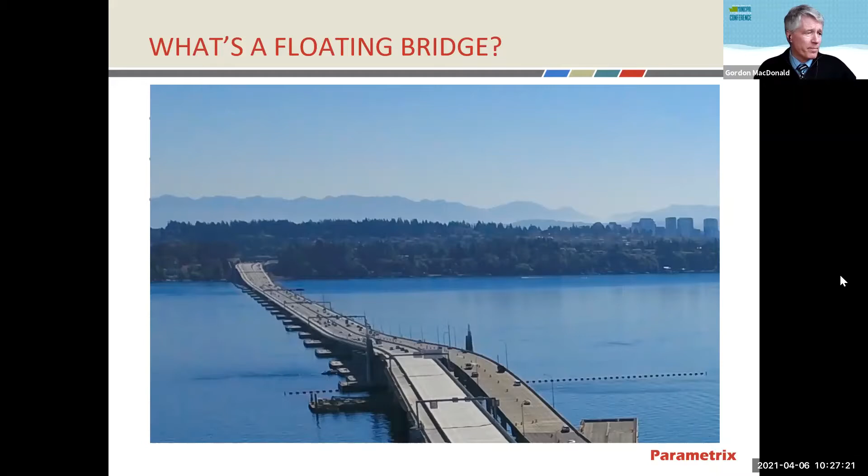And so that raises some concerns and some unique challenges, because you can't convey and treat stormwater the way you would in a landside environment.

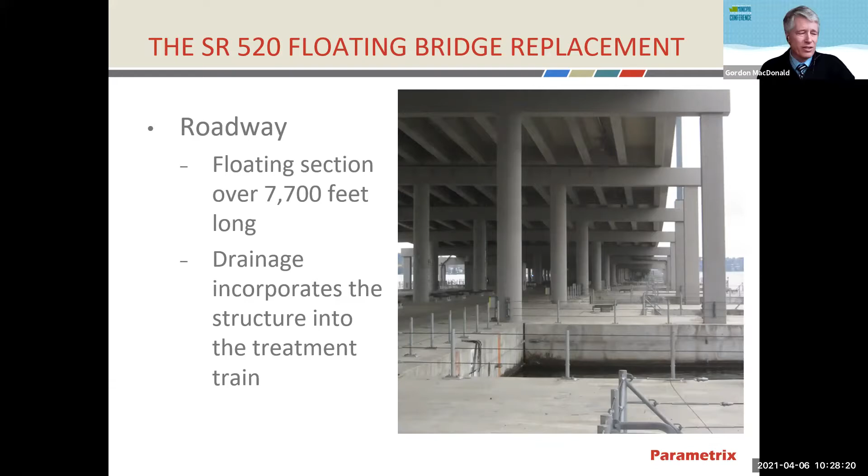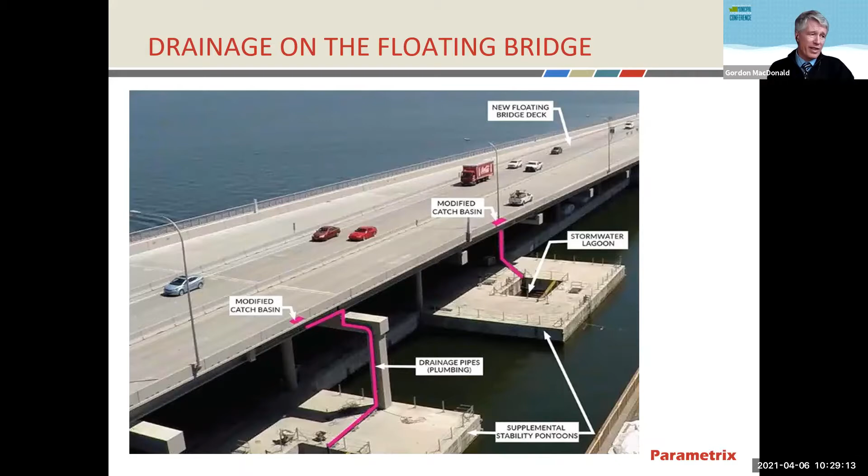So how does stormwater get from the deck of the floating bridge down to the lake level? We installed modified catch basins - meaning they have a very deep or deeper than normal sump from the invert down. The purpose of that is to collect more grit and sediment from the roadside and allow it to settle out before going down the conveyance pipes. The conveyance pipe is connected to the bottom of the roadway deck, then down the structural columns to the supplemental stability pontoons, and across into the center part of those pontoons to what we call a stormwater lagoon. We'll talk more about why that's important in the overall treatment train a little bit later.

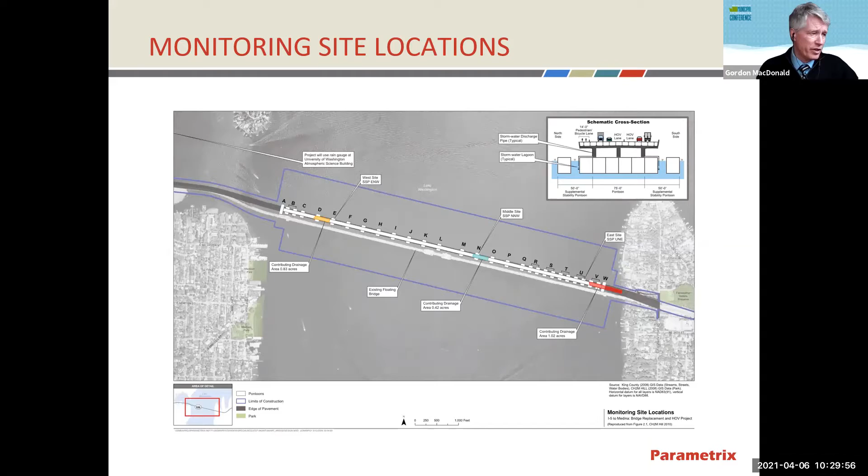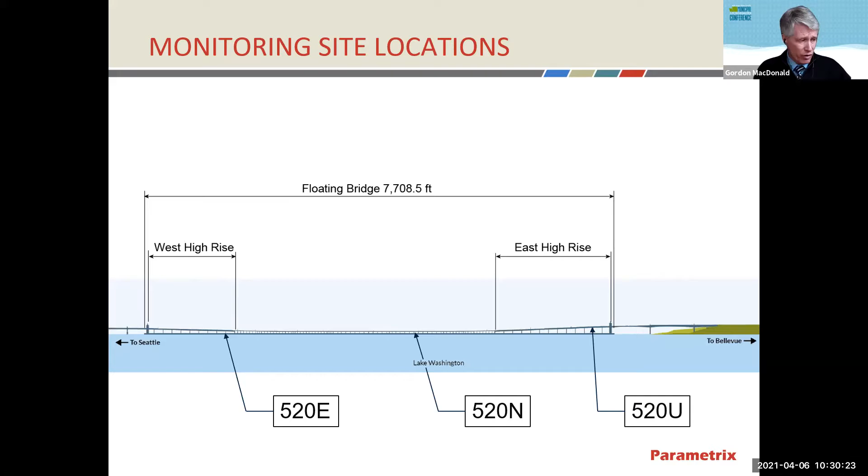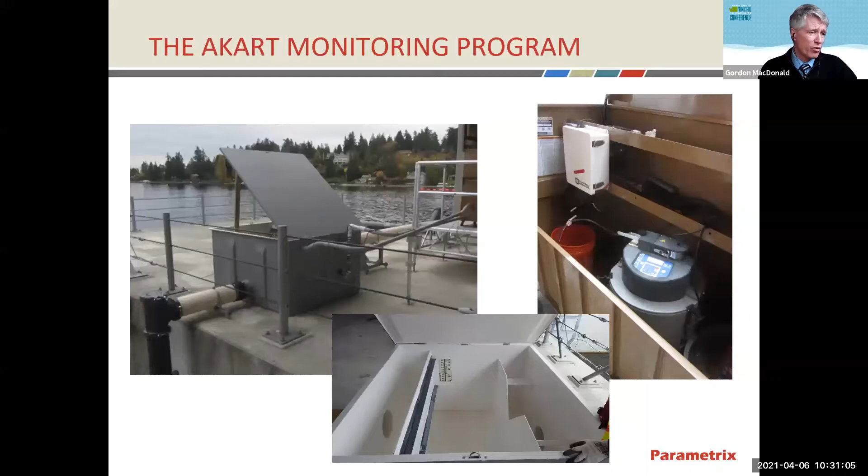As I talked about before, there were some unique issues with conveying and treating stormwater. So we had to develop what is known as AKART, all known, available, and reasonable methods of prevention, control, and treatment. Early on, we looked at different alternatives for combinations of treatment alternatives.

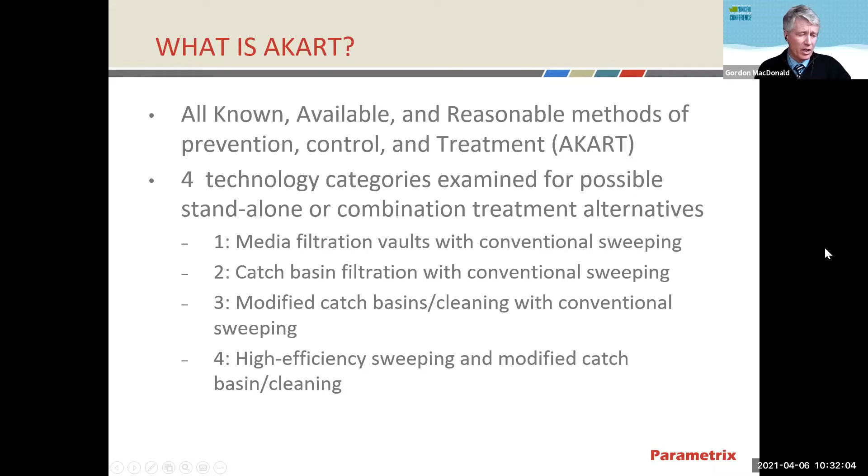One was media filtration with conventional sweeping. Another was catch basin filtration, also with conventional sweeping. And these modified catch basins with conventional sweeping, and also high efficiency sweeping and modified catch basin cleaning. We'll talk about what that high efficiency sweeping really means a little bit later.

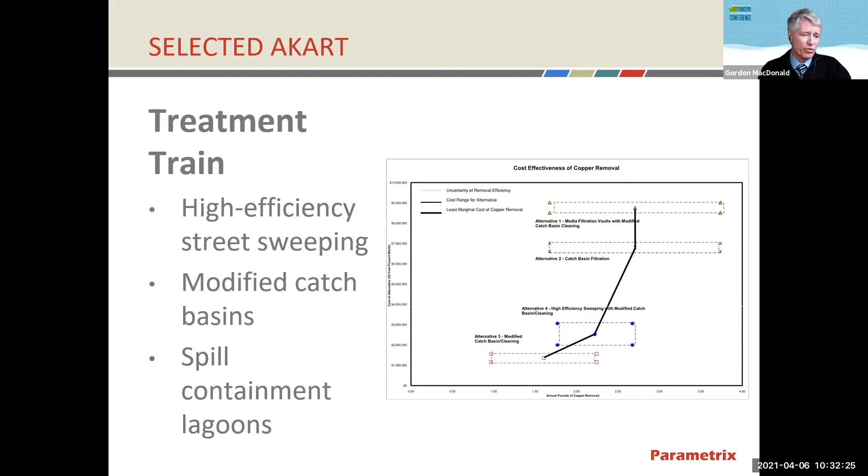In the end, our proposed AKART treatment train included high efficiency sweeping, modified catch basins with a larger than normal sump in the catch basin, and spill containment lagoons. These spill containment lagoons are really what Paul is going to talk to us about - that's the hole in the middle of those supplemental stability pontoons. Go ahead, Paul. Okay, thanks, Gordon.

As part of the AKART analysis, once you have AKART you're able to use mixing zones. As part of the agreement and the approval for the bridge, we had defined a mixing zone that was based on discharging into the lagoons and then mixing with lake water underneath the lagoons. We ended up with a concentration at the mixing zone boundary that was allowable, and that concentration was based on what typical roadway runoff would look like, with sort of treatments to it.

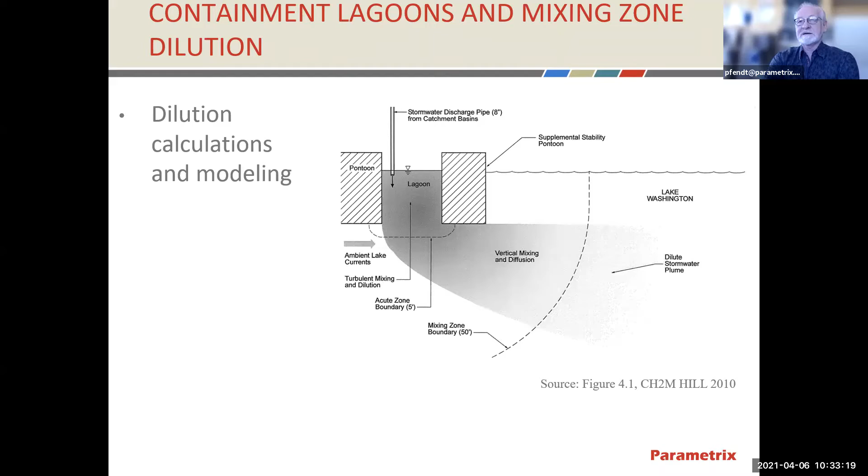So next slide. Basically what happened is that we back calculated from the edge of the mixing zone what the concentrations were that would be allowable there, and back calculated what the resultant concentrations would need to be for the water quality design storm with a certain concentration. The purpose of this was for Ecology to confirm that the performance of our system was going to be able to reasonably meet the mixing zone concentration at the edge of the mixing zone.

In order to do that, different targets were established that are shown in this table. These targets were based on if the concentrations that we monitored were these numbers or lower, then we would be expecting to meet our mixing zone. Remembering that these are based on the water quality design storm - this concentration in the water quality design storm, mixed in the lake and in the mixing zone, results in complying with our mixing zone responsibilities, or our edge of mixing zone responsibilities.

So I highlighted the copper. We're focused a lot of what we're going to talk about the rest of the way on copper. What we needed to do, and what the agreement was, is that during the course of our monitoring, where we're going to monitor 22 storms, we could not exceed this number, 67.7 parts per billion, more than once. Mid-span is a slightly different size basin and so has a different mixing zone, so it was a slightly higher number. But we're really focused on the 67.7.

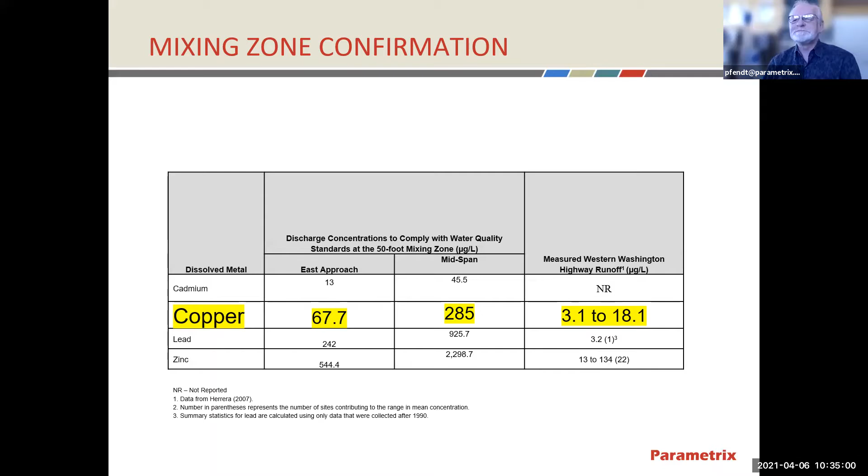Next - so what does high efficiency sweeping mean? The sweeping identified in the AKART analysis is to do it once a month, and by schedule WSDOT does it once during the first 4 days of the month. They wouldn't tell us exactly which one. They sweep the entire road surface, seat to seat, meaning in front of the ecology block walls, wall to wall, inside and outside the shoulders.

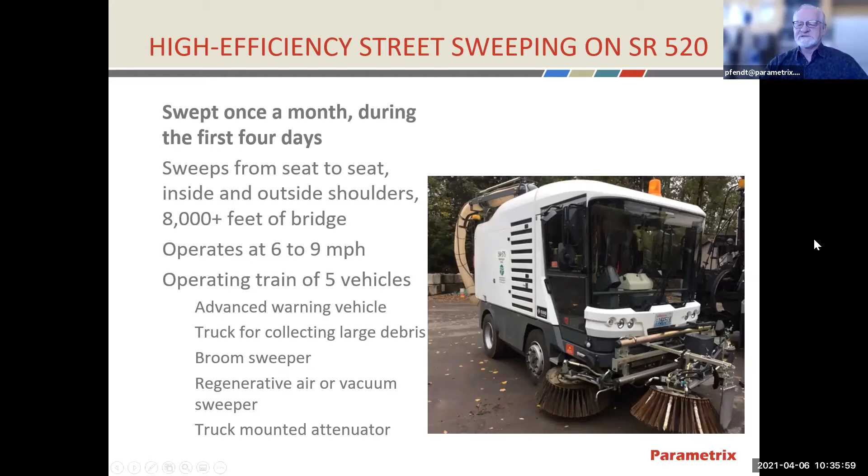A little bit over 8,000 feet - they go up the approaches. There's a vehicle train with 5 vehicles that goes at 6 to 9 miles an hour, and they do it in the middle of the night. There's a number of different vehicles: warning vehicles, one vehicle that picks up the bigger stuff, and then the real heart of this, the regenerative air vacuum sweeper that does all the sweeping, and then basically the rear guard for this approach. So it's a 5 vehicle train that goes up and down the bridge once a month in the middle of the night.

Our AKART monitoring objective was to meet that dilution target that I mentioned, and we could only have one event allowed to exceed. What we were doing in the monitoring program was evaluating sweeping and oversized catch basins and how well they were doing. By the statistics identified, we needed to do 22 events total at the 3 stations that qualified.

And then we had to set everything up on the bridge. So you saw the setups that we had for the weir boxes that were measuring the flows, identifying and cutting into the drainage pipes coming off of the road surface, then intercepting that water and sampling that stormwater and sending it in.

We needed to calibrate the systems. It was pretty easy because it was all impervious surface, but we did find a little bit of difference based on some delays with storage of water actually on the surface of the pavement and so on. So we made those adjustments and set up all the other logistics about getting ready to sample. And then we cleaned out the catch basins right before we started, so we were starting with basically a clean slate.

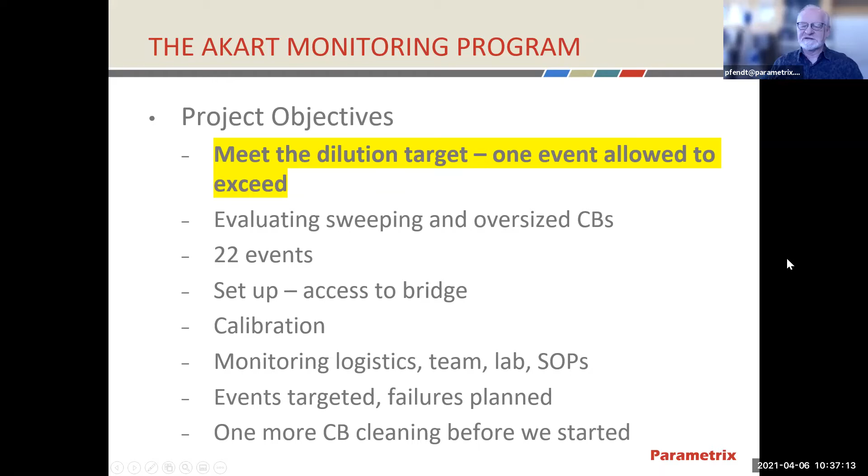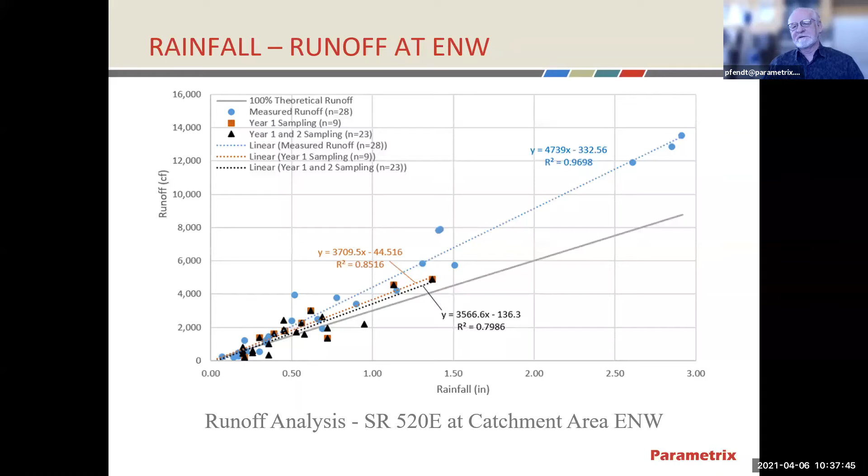This is a result of the calibration. You can see that the heavy bar is what the theoretical runoff would be, and we had slightly different numbers than that. The purpose of this was to make sure we were calibrating what our expected runoff would be against the rain gauges that were about a mile away, so that we could program the samplers to get the right sampling regime for the right sample size for our mixed samples.

Now we're going to talk about some results. These are the basic results of dissolved copper in the stations by season, roughly by calendar season - December to February and so on. The first season is winter, second and third are summer, and the fourth is fall. The chart on the right shows the same thing as the left, only zoomed in so you can see more detail on where our concentrations were. You can see they were pretty consistent and basically in the teens, other than a couple of outliers in the summertime.

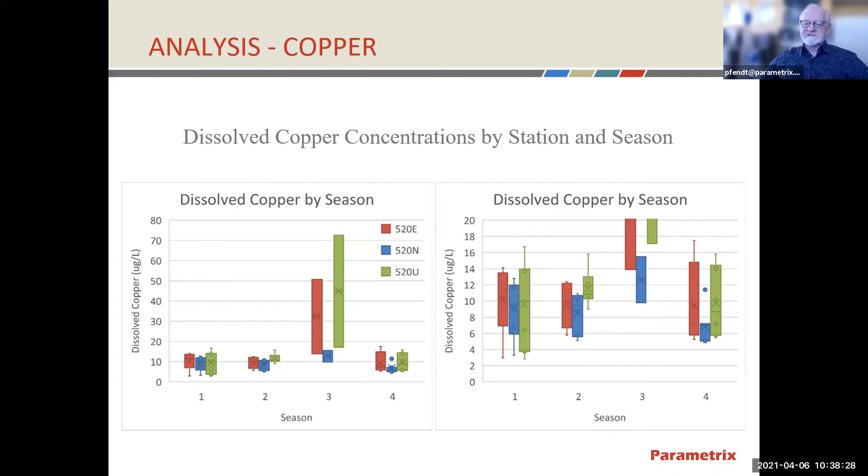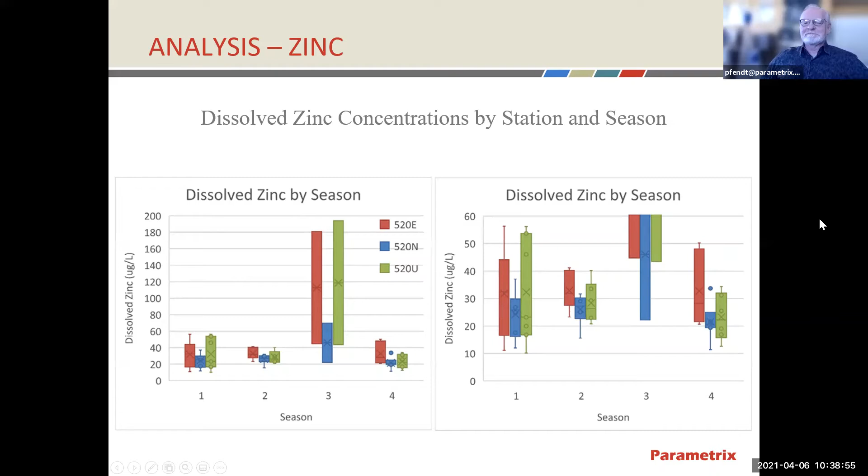In our analysis, we only had one event that exceeded out of 66 - that's 3 stations times 22 events. We only had one station and one event where we exceeded the copper target. All the other constituents shown on that original chart were met for all the sampling events. As we described, our program confirmed that our predicted analyses of concentrations at the edge of the mixing zone were validated by the concentrations we were getting. They were actually, other than the one event, generally quite a bit lower than what was expected.

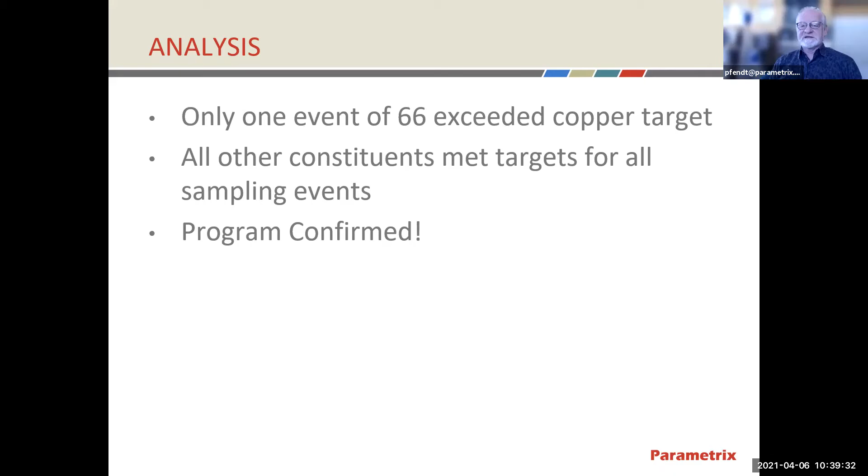So let's dig into the data a little bit here. The first thing we looked at was whether there was a difference in concentrations based on the number of days since we swept. As I mentioned, they could have swept the first, second, third, or fourth day of the month, and you'd think it wouldn't matter that much. Since we didn't know exactly when they did it, we had to assume that every event was one of those 4 days.

We looked at the number of days since sweeping, comparing days since sweeping against the total mass per acre, using the mass concentration of the constituent we're evaluating to normalize for different basin sizes, since the basins were slightly different sizes, so we looked more toward loading rather than concentrations. The trends went up and down depending on which day of the month we guessed they'd swept, and how long it had been since the last sweeping. So that tells me it's really not strongly dependent on how many days since sweeping—sweeping is good, but there's not a strong correlation between earlier and later in the month.

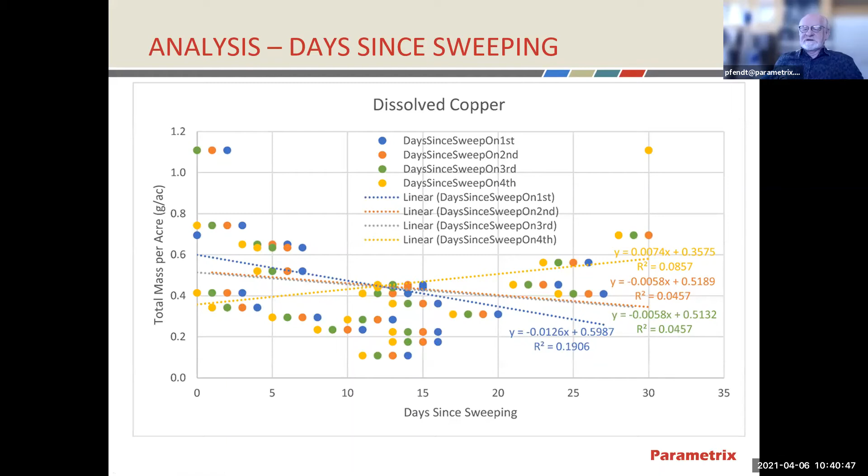Next we looked at how many days since the clean out of the oversized catch basins, to see if any trends developed for dissolved copper by minimum days since the catch basins were cleaned out. We monitored over two years, looking at the first year and second year at different stations, and you can see where the trend lines end up—there really wasn't a difference observed over the course of the year relative to how long it had been since the catch basin was cleaned out.

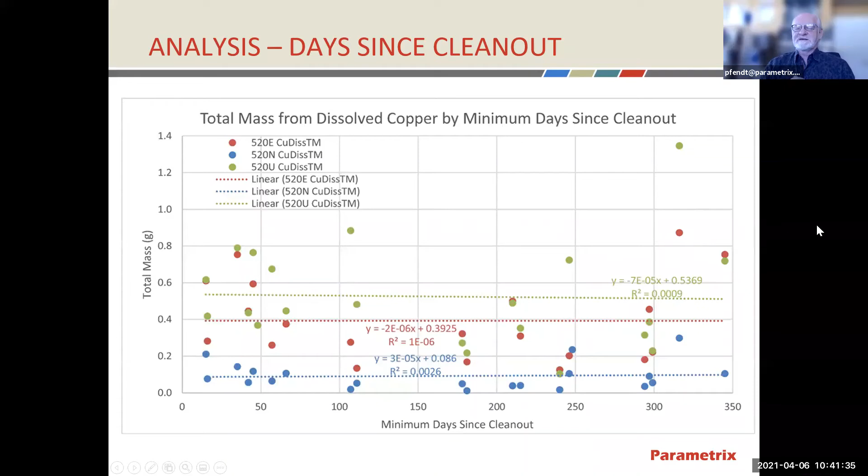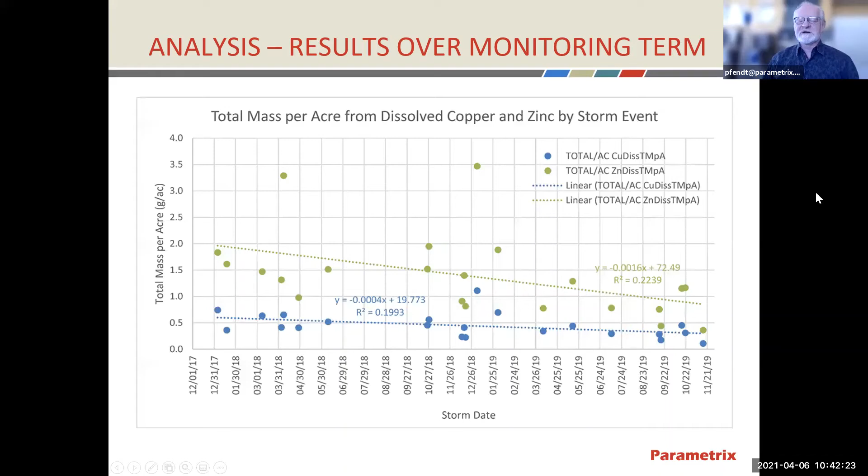We also looked at this over the whole two years of the monitoring period to see if there were changes over the life of the project—the sweeping, the catch basin cleaning, and so on. This shows copper in blue and zinc in green, and you can see just a slight downward trend in concentrations during the life of the project. You can interpret that as you like, but there was a slight downward trend, a lowering of the total mass per acre.

Next we looked at how many antecedent days of no rain there were before each event. We didn't have any event with fewer than, or more than, about 7 days of antecedent dry period. This is just copper, looking at somewhere between 0 and 7 antecedent days over the course of 22 events over 2 years, and how many days since it had rained before. There was a slight upward trend in general on the first couple of stations as you got further from the last rainfall, then no trend—the blue dots at the bottom are the station sitting in the flat part of the bridge.

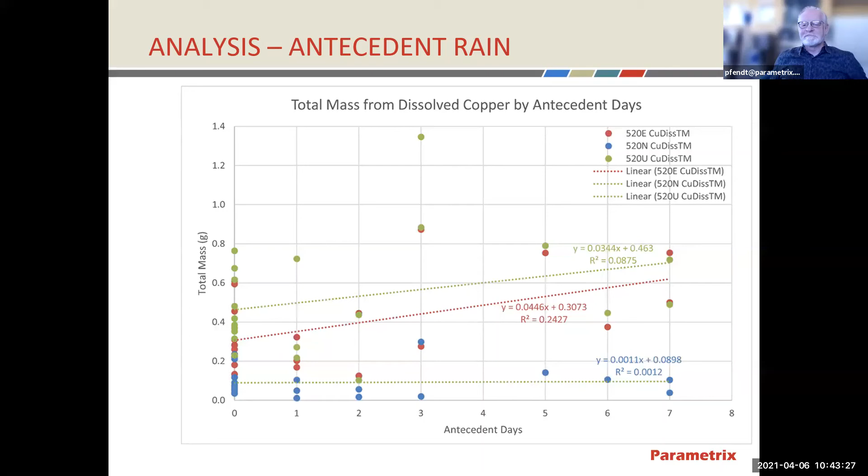This is one of the more interesting things we found—we looked at real automobile traffic counts before the sampling event. We looked at a 24-hour count before we started sampling the storm. This was looking at whether more cars on the road would give us higher concentrations, and this was very immediate, the 24 hours before we monitored. You can see the trend lines here.

Again, this is dissolved copper, and there's basically no trend, or a slightly lowering trend, as you get to more cars in the 24-hour time frame before the sampling started.

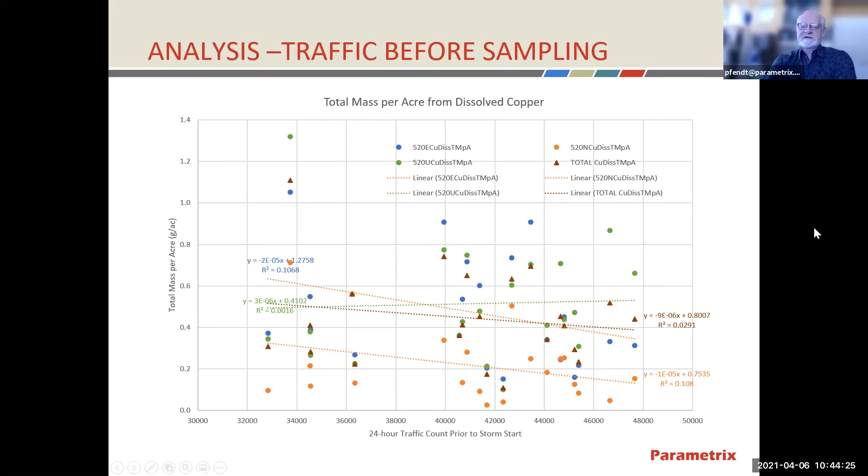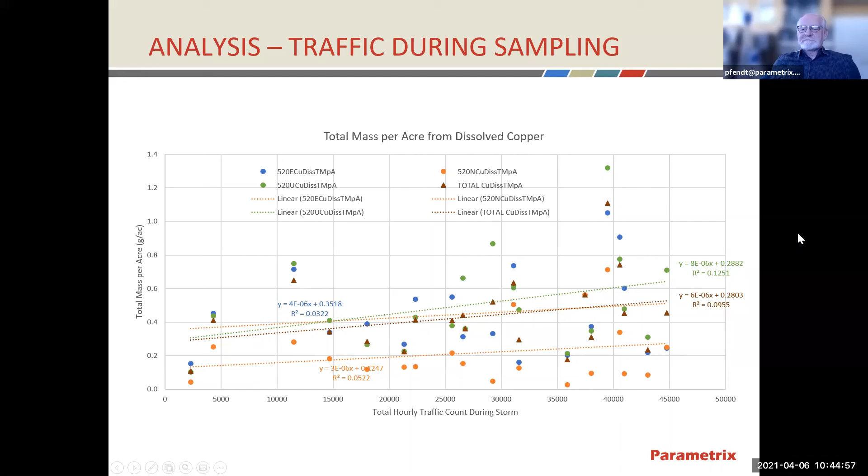Next slide. So this is when we started digging into it. We did mention that we had one event that exceeded the 67.7 — it was around 72 or 73, so a slight exceedance.

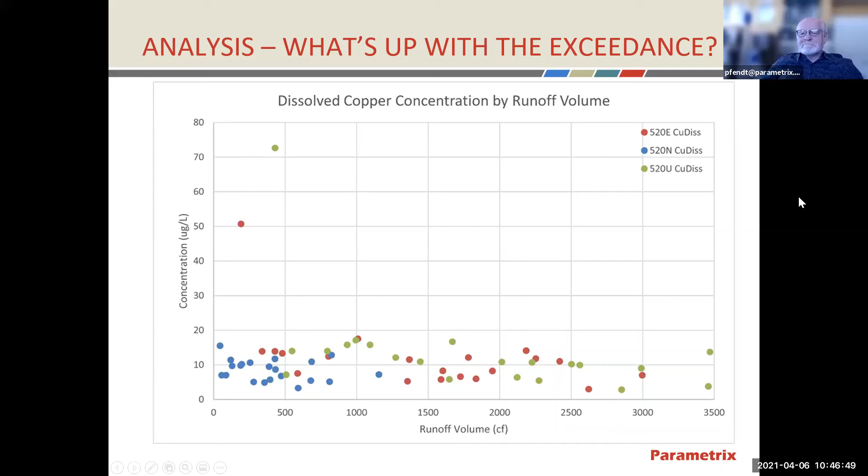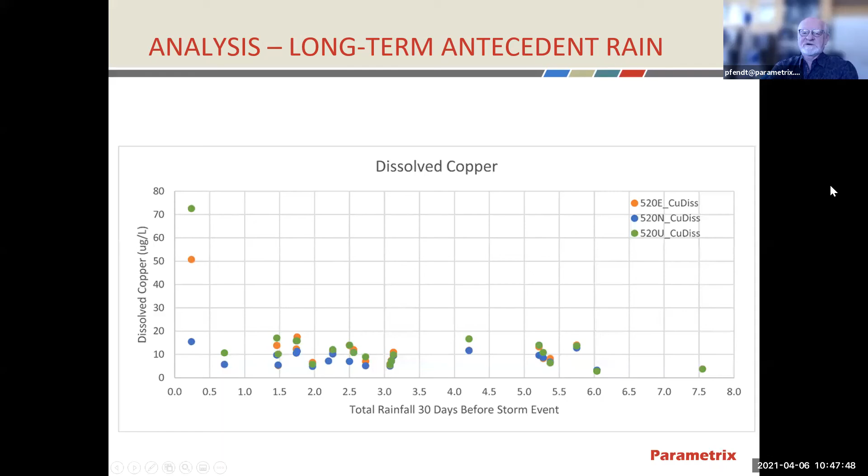Next slide. So our summary here is that we did achieve the goal we had agreed to with Ecology. AKART objectives were achieved, along with a couple of things about it working.

It's really somewhat inconclusive whether more or less sweeping is warranted. If you remember the trends going up and down depending on which day of the month we guessed they had swept, there wasn't really a strong ability to say that 25 days was good and 20 was bad, or the reverse.

We found the amount of sediment in the deep catch basins supported annual cleaning — they were getting pretty close to being full when we cleaned them out. So there is sediment out there, and we had about the right size; we found that having larger catch basins mattered and helped us.

It's useful to explore the difference between stations. There's not really a strong belief to test here—it's the same number of cars, the same width of pavement, everything's the same, other than it's steep rather than flat. And there is a difference: generally, the flat station in the middle of the bridge had slightly lower concentrations than the ones on the approaches. So it's definitely interesting and worth exploring and comparing those things.

The last thing I want to focus on is setting a different target, including variable runoff. At the beginning we talked about how the mixing zone was based on a water quality design event—the total volume for the water quality design storm with the target concentration into the mixing zone. The variables are the volume of water, the concentrations, and the hydrodynamics getting to the mixing zone and where that mixing zone edge would be. If you have a smaller amount of water with the same concentration, you actually have a lower concentration at the mixing zone. That 67.7 number was based on the idea that we would be at the edge of the mixing zone with a full water quality design storm.